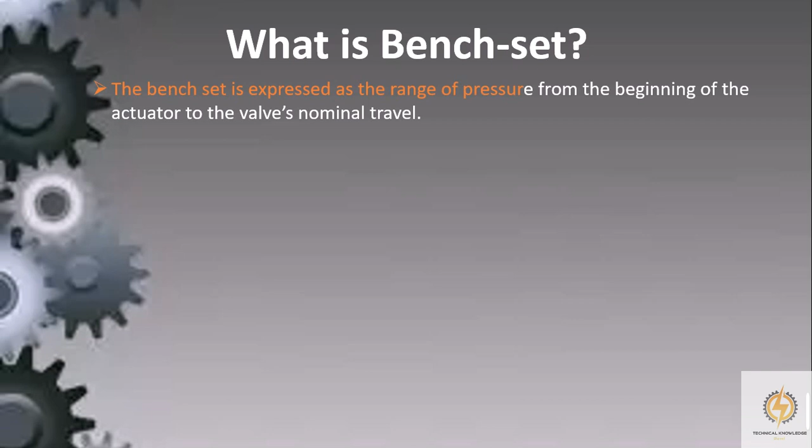What is bench set? The bench set is expressed as the range of pressure from the beginning of the actuator to the valve's nominal travel. Because the actuator's spring rates are not very compatible, it is sensible to believe that only one of the bench set points can be met, and the critical value adjusted should be the one. This setting is performed before the actuator stem is connected to the valve stem.

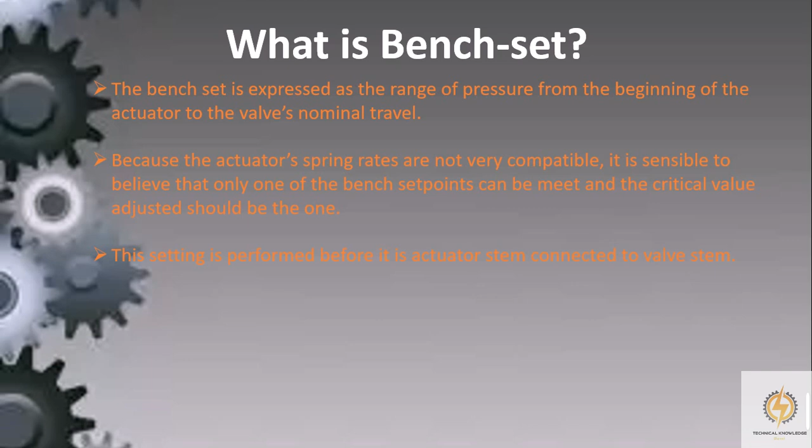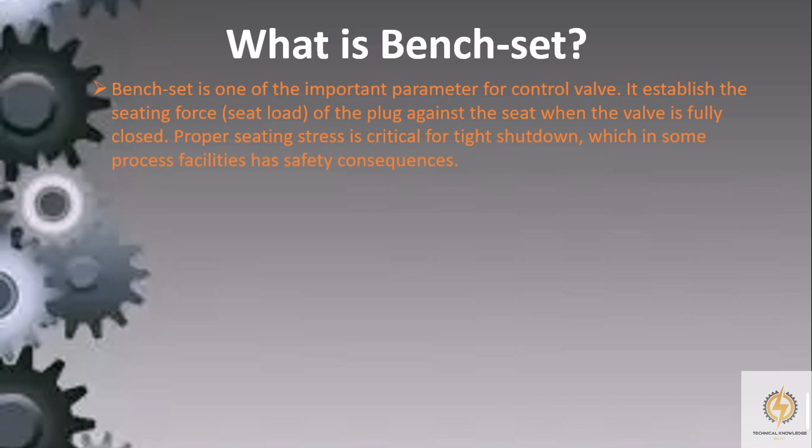Bench set is one of the important parameters for control valve. It establishes the seating force, seat load, of the plug against the seat when the valve is fully closed. Proper seating stress is critical for tight shutdown, which in some process facilities has safety consequences.

Step 1. Uncouple the valve stem and actuator stem.

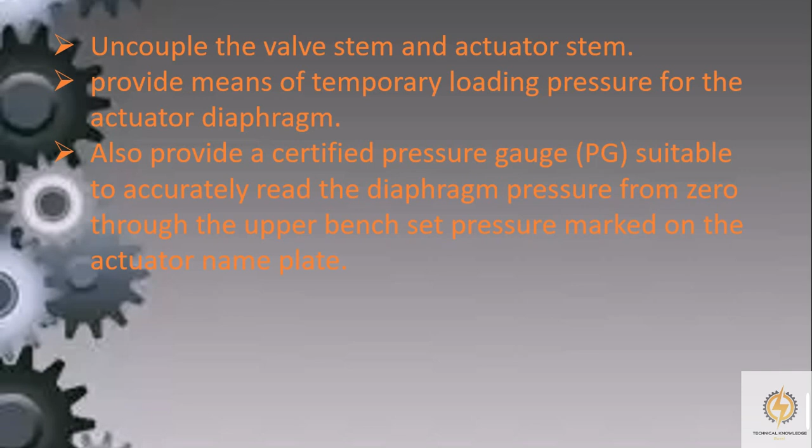Temporarily load pressure for the actuator diaphragm. Also provide a certified pressure gauge, PG, suitable to accurately read the diaphragm pressure from 0 through the upper bench set pressure marked on the actuator nameplate. Provide a temporary means of applying an adjustable loading pressure to the actuator during the adjustment, e.g. a pressure regulator.

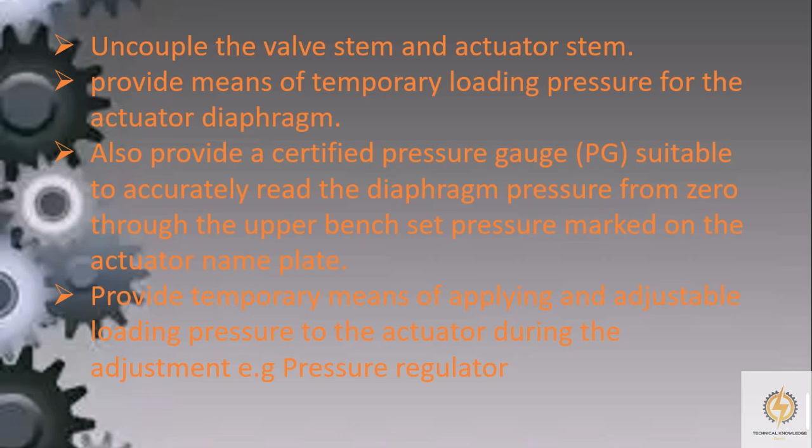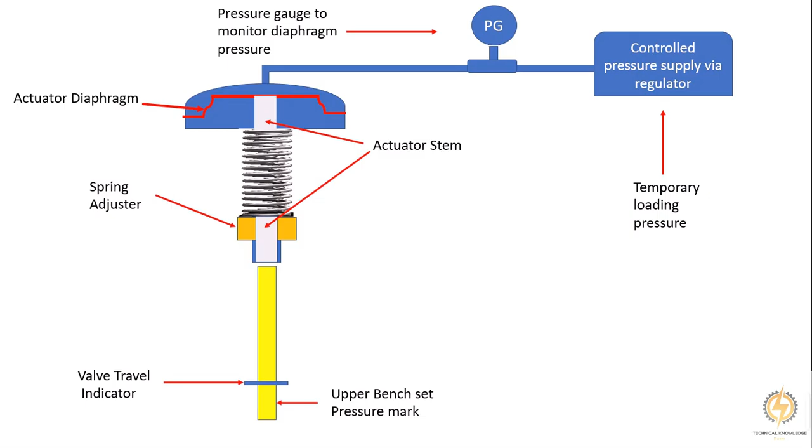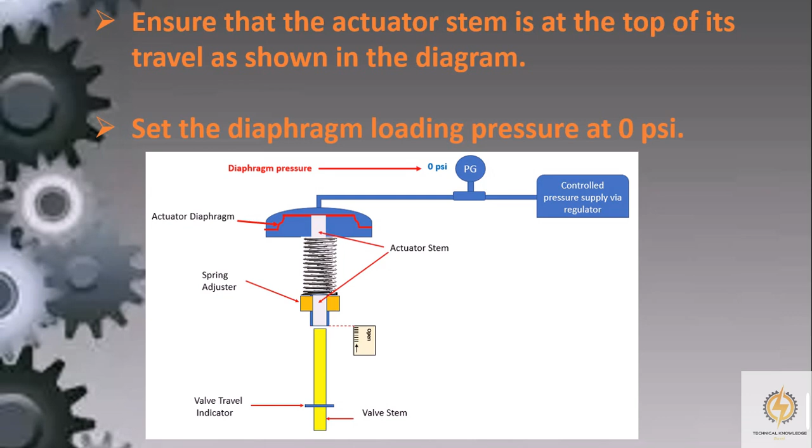Step 2. Ensure that the actuator stem is at the top of its travel as shown in the diagram. Set the diaphragm loading pressure at 0 psi. Slowly raise the pressure from 0 psi towards the lower bench set pressure while checking for the first movement of the actuator stem. Monitor the actuator stem, which should show movement at the lower bench set pressure at 3 psi.

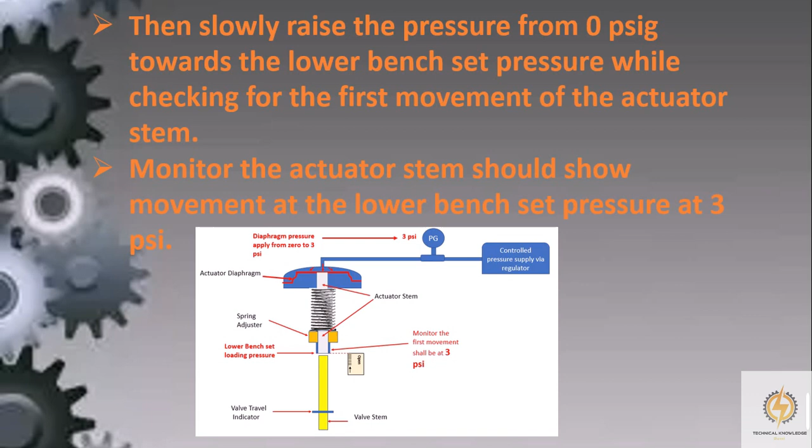If movement occurs before or after the lower pressure is reached, adjust the spring adjuster into or out of the yoke until the actuator stem's movement is first detected at the lower bench set pressure of 3 psi.

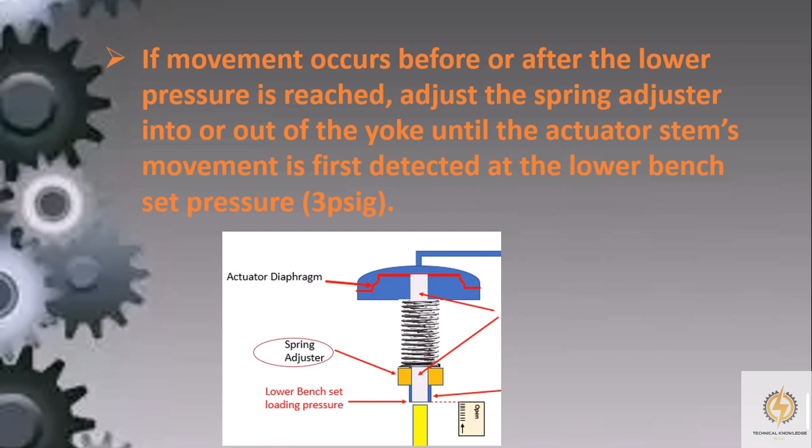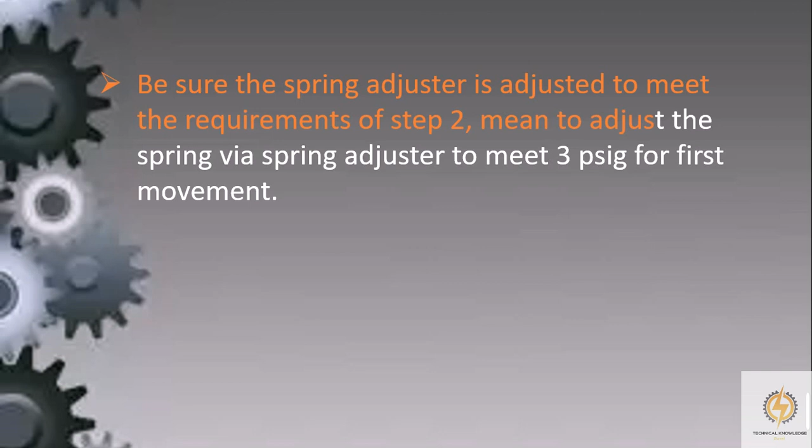Step 3. Be sure the spring adjuster is adjusted to meet the requirements of Step 2, meaning adjust the spring via the spring adjuster to meet 3 psi for first movement.

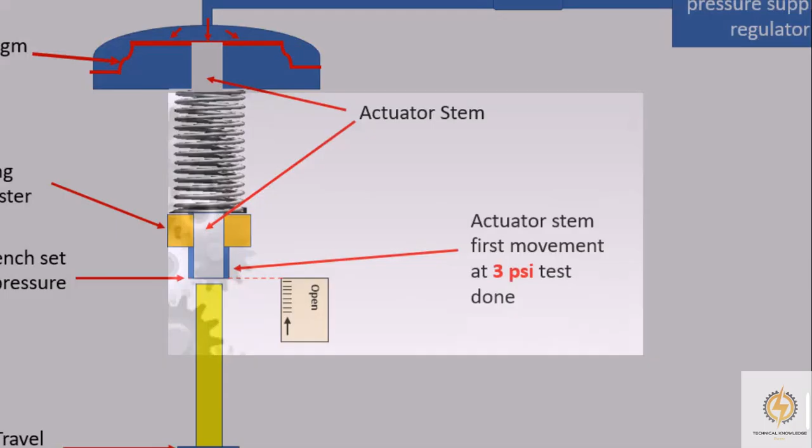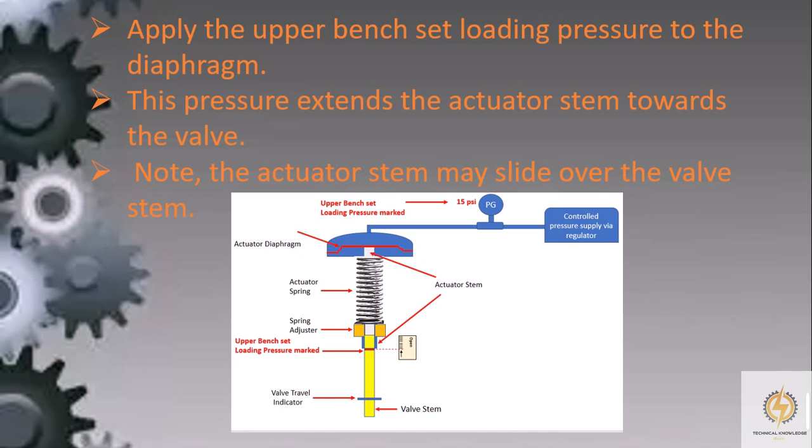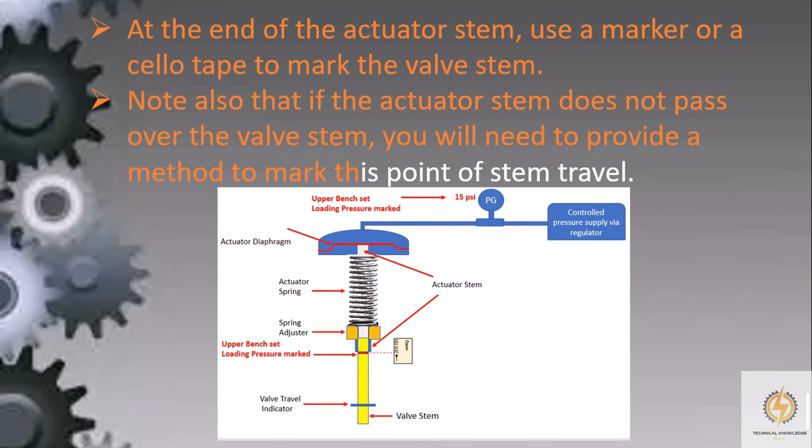Step 4. Apply the upper bench set loading pressure to the diaphragm. This pressure extends the actuator stem towards the valve. Note, the actuator stem may slide over the valve stem. At the end of the actuator stem, use a marker or cello tape to mark the valve stem. Note also that if the actuator stem does not pass over the valve stem, you will need to provide a method to mark this point of stem travel.

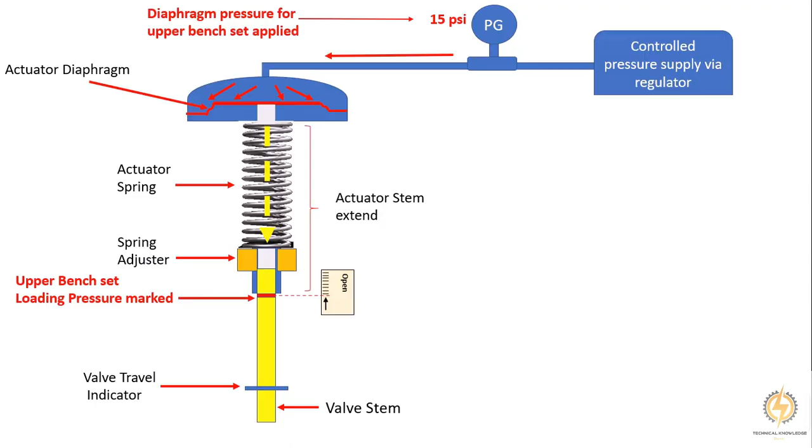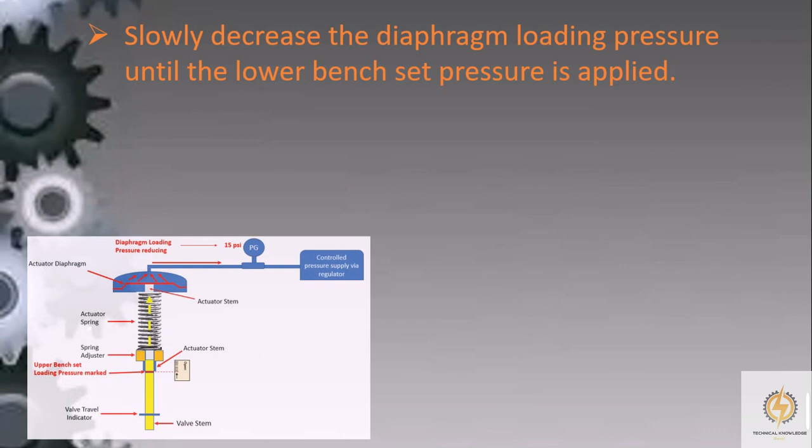Step 5. Slowly decrease the diaphragm loading pressure until the lower bench set pressure is applied. Measure the distance between the marker or tape on the valve stem to the end of the actuator stem. The distance should match the travel span shown on the travel indicator scale.

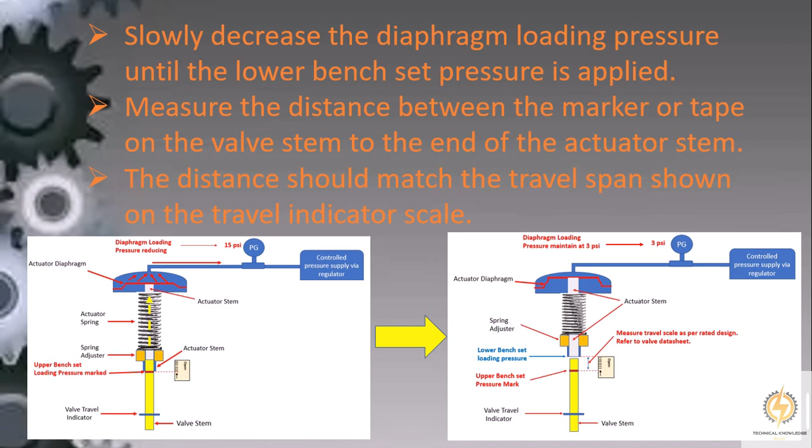If the span of travel is correct, the bench set adjustment is complete. You can then proceed to couple the valve stem and actuator stem together.

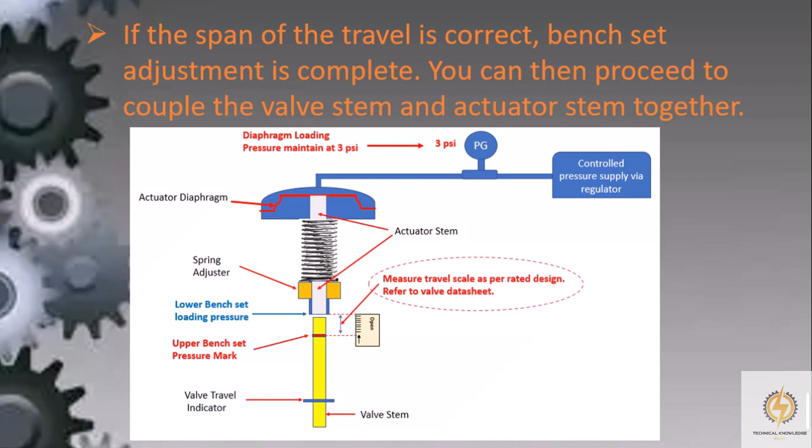Step 6. If the span is not correct after a few attempts at stroke checking and spring adjustment, then the spring may have been damaged, or you have the wrong spring installed on the valve actuator. In this case, actuator spring replacement is required.

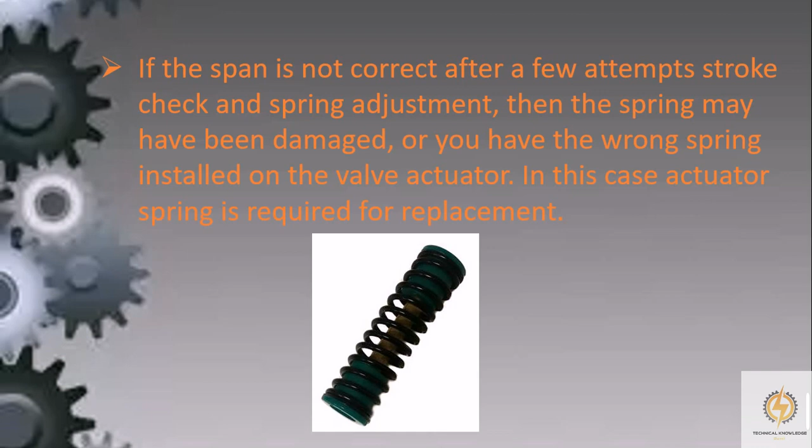Other method of bench set on direct acting control valve.